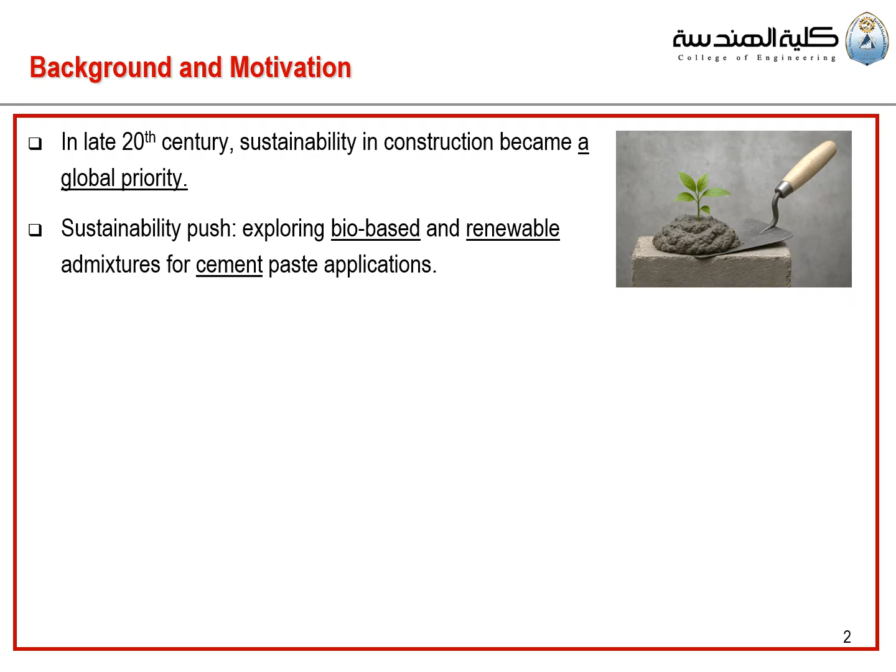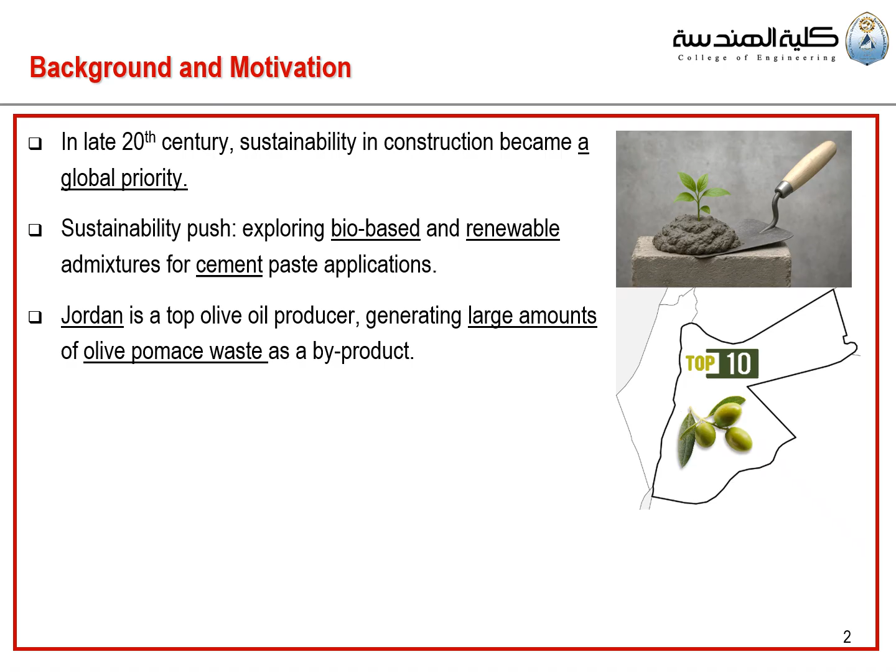Here in Jordan, we have a problem, as Jordan is considered one of the top 10 olive oil producers. We generate a large amount of agricultural waste called olive pomace waste. This olive pomace is renewable, rich in lignin, and has potential for cement modification.

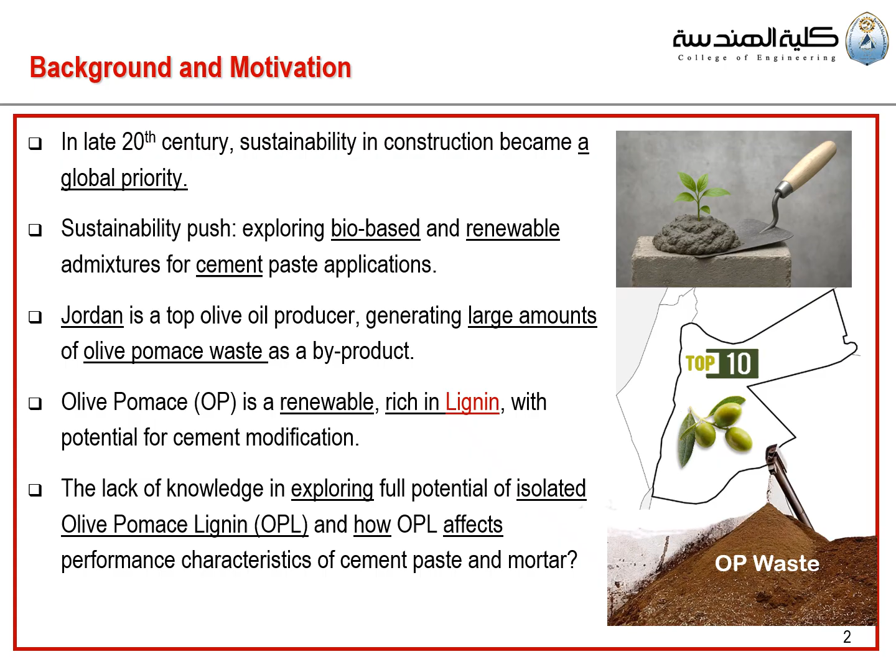Scanning the literature and state of the art, we found the potential of isolating olive pomace lignin has not been fully explored. The use of olive pomace itself in cement modification is not new, but using isolated lignin is a novel approach to test its effect on performance characteristics, especially in cement-based mortar.

This is the third study in a line of research effort. Our previous work established the successful application of OPL (olive pomace lignin) in asphalt binder modification, and we also studied its performance, economic, and environmental evaluation in asphalt concrete pavement. Both were published this year and will be on the reference list in the last slide. Feel free to access them for more details on the application of OPL.

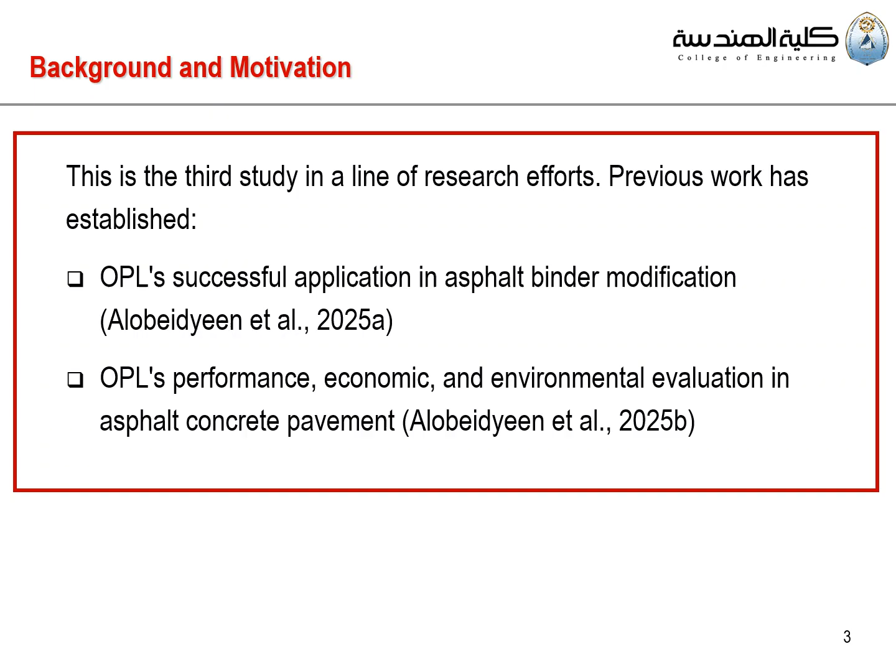The research objectives: first, we want to characterize the fundamental behavior of OPL as a cement admixture. Here, OPL is tested as a chemical binder modifier, not as a structural component. We are not interested in the effect of OPL on the original mix composition or in replacing cement or sand in mortar, because we believe lignin is an organic polymer.

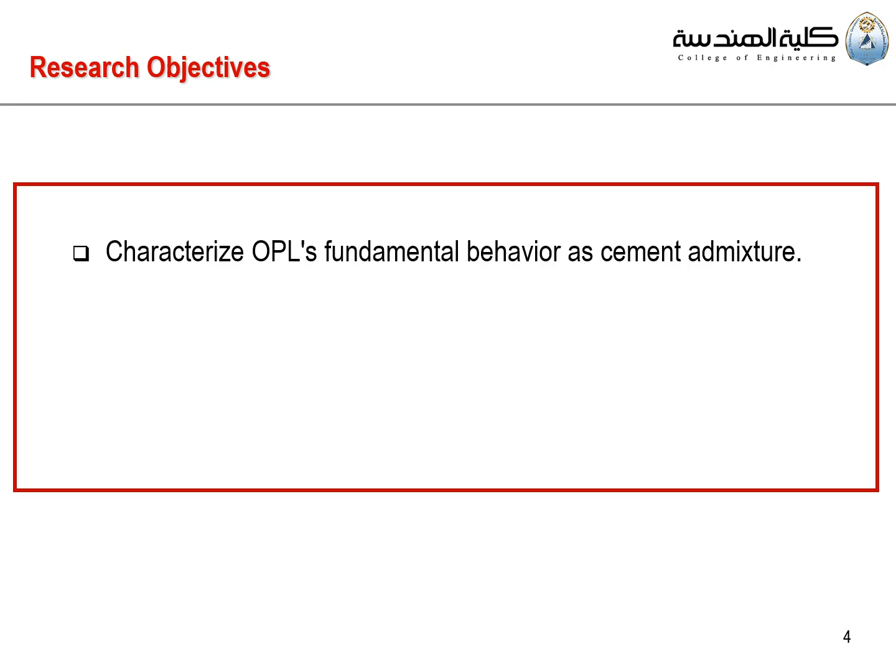It will act differently compared to olive waste byproducts like ashes, which are sometimes successfully used to replace sand because, despite being waste, ash has a mineral silica base and exhibits pozzolanic activity. Next, we want to quantify mechanical property development versus dosage, and then identify the optimal dosage for maximum performance enhancement.

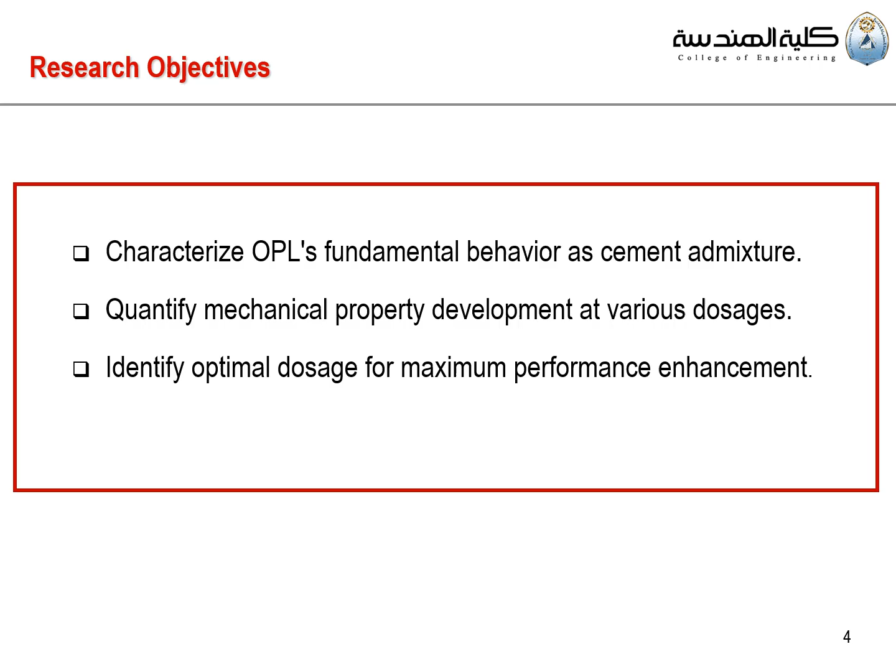Moving to the experimental methodology: the materials include olive pomace sourced from a local olive mill in Tafila, Jordan, and Portland cement, type CEM I, supplied by Lafarge Jordan, Rashadiyah Tafila. We also use sand and mixing water to develop the mortar.

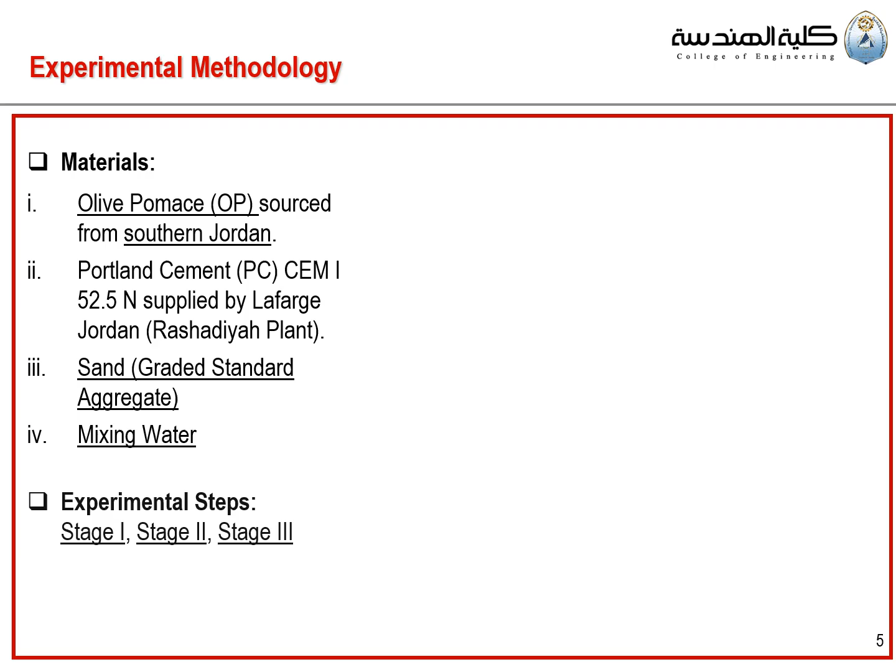We have a chemical team that worked extensively on this stage, and the final product is the extracted lignin in dry basis form. We ran many tests to characterize and validate this lignin, such as elemental analysis, FTIR spectrum, and SEM images, so we can use it later.

Stage 2 is basically what this research is about: we want to have the OPL-modified cement base. We add lignin in dry form and mix it with cement, then with water, to produce the modified cement base. The dosages used range from 0.1 to 2% by cement weight.

We then test the standard consistency and setting time, the initial and final setting time. Stage 3 focuses on strength testing.

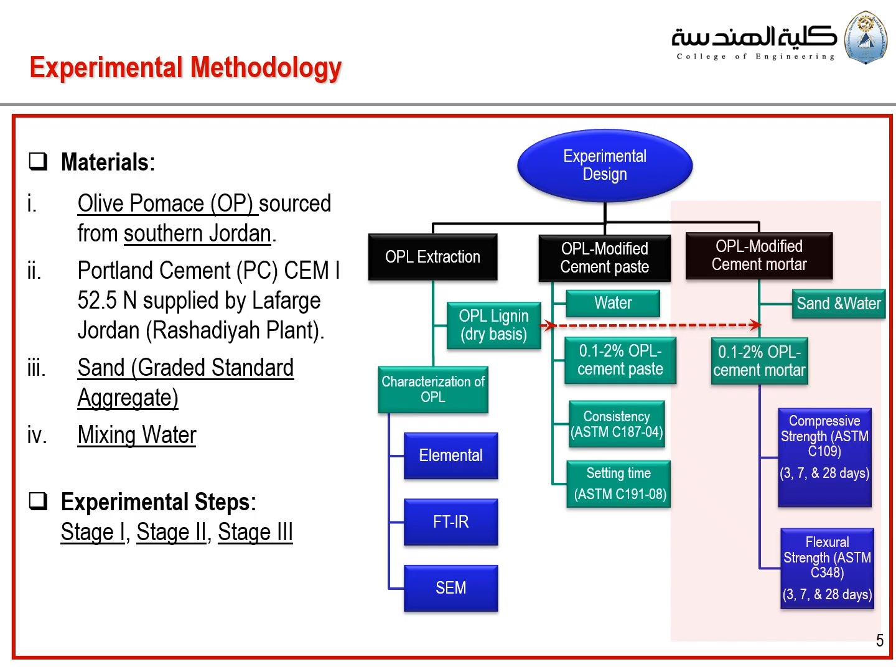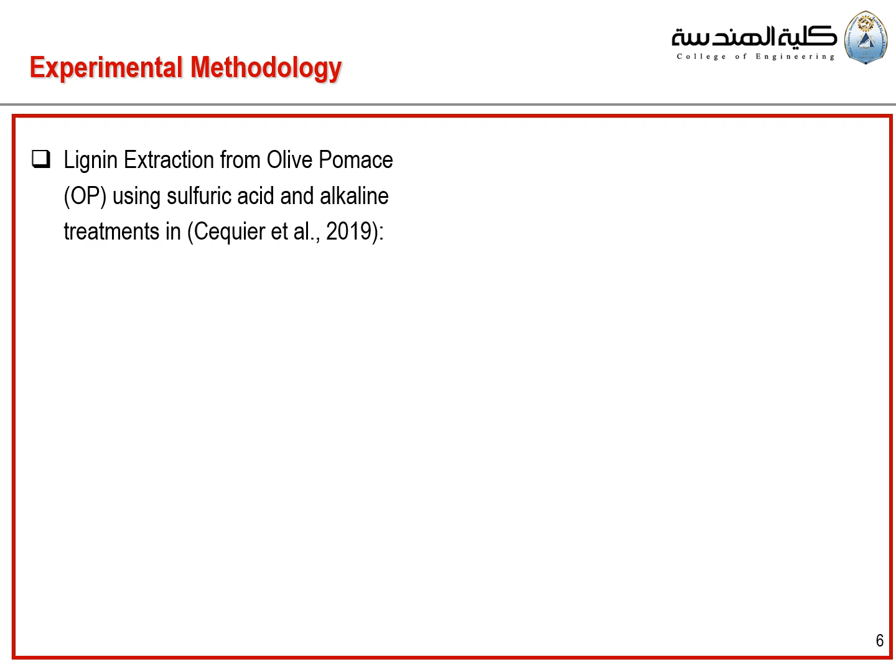For this slide, I won't spend much time, but briefly, the lignin extraction process went through sulfuric acid and alkali treatment using existing chemical research methods. We mix the olive pomace with sulfuric acid, pass it through a reactor, and perform alkali and pH adjustment using NaOH.

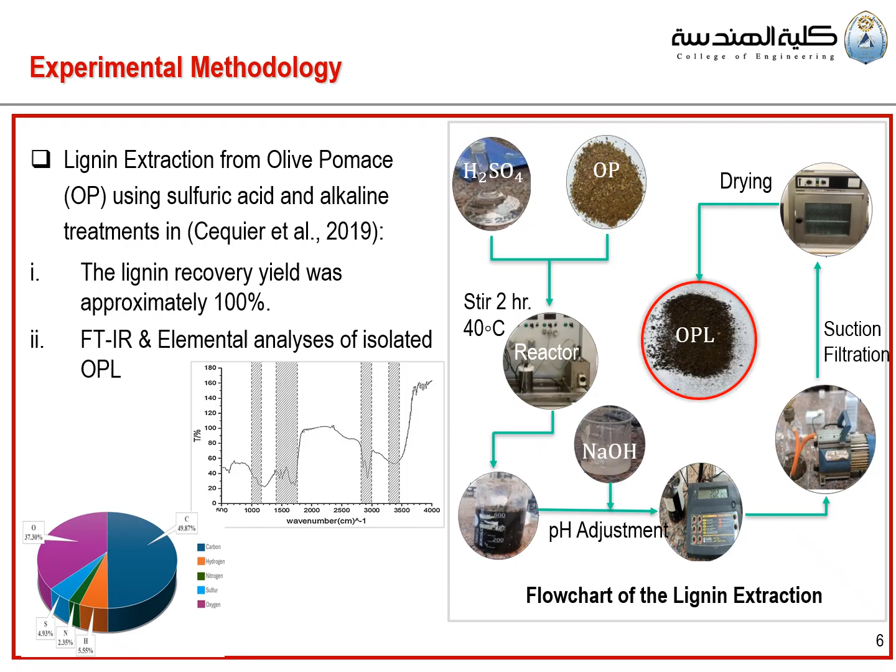Finally, we obtain the OPL. Using this specific methodology, the yield was 100% recovery of the total 35% lignin content in the olive pomace. We also performed extensive analysis to characterize and validate the OPL. If you are interested, you can refer to our previous work for more details on the lignin extraction, in the two publications mentioned earlier, both published this year.

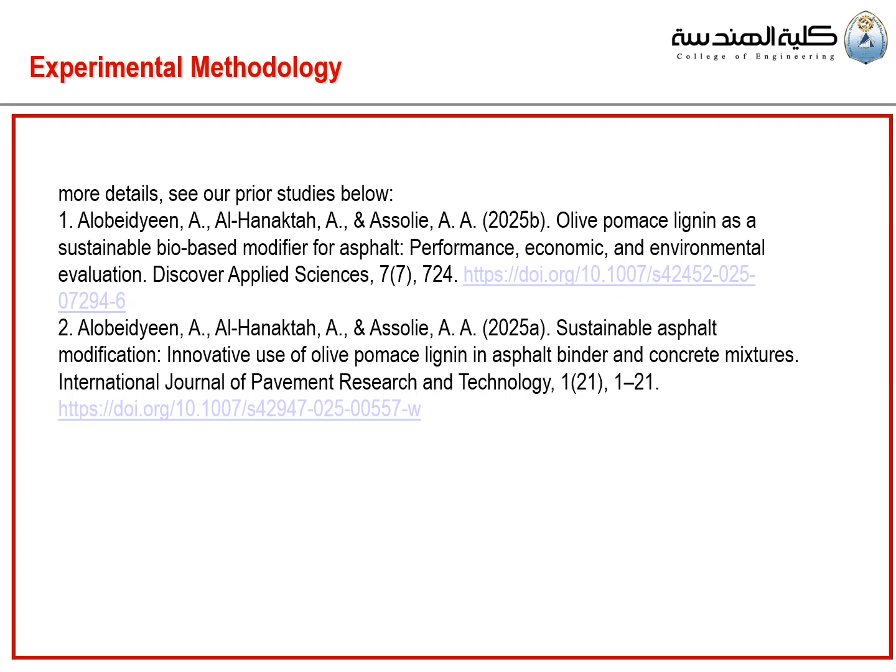Experimental results. First, we will present the cement paste performance. So here we have two tests.

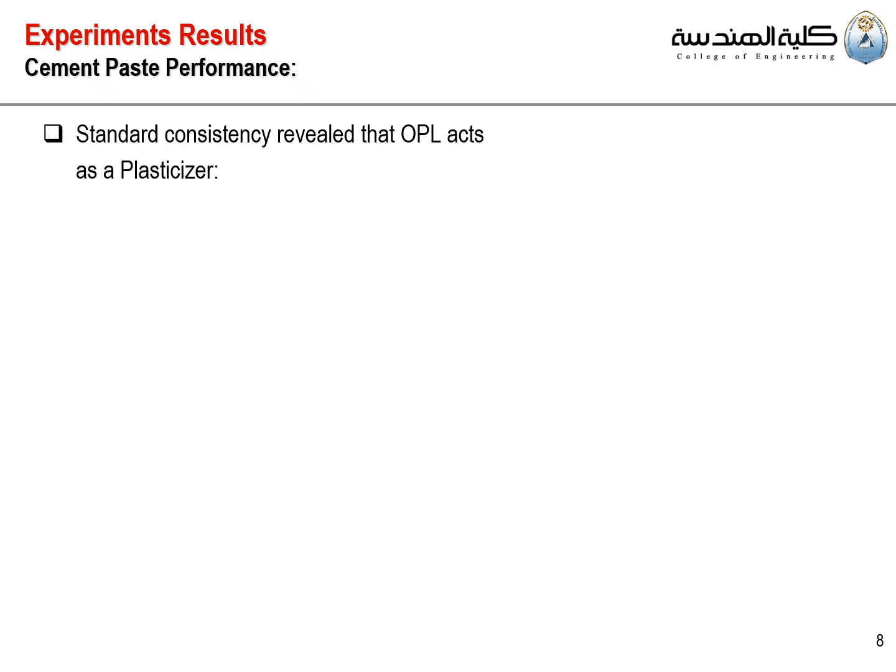This reduction can be categorized based on dosage levels. At low dosages, from 0.1 to 0.3%, we have water reduction from 2.5 up to 6.8%. This suggests that OPL is insufficient to achieve complete particle surface coverage.

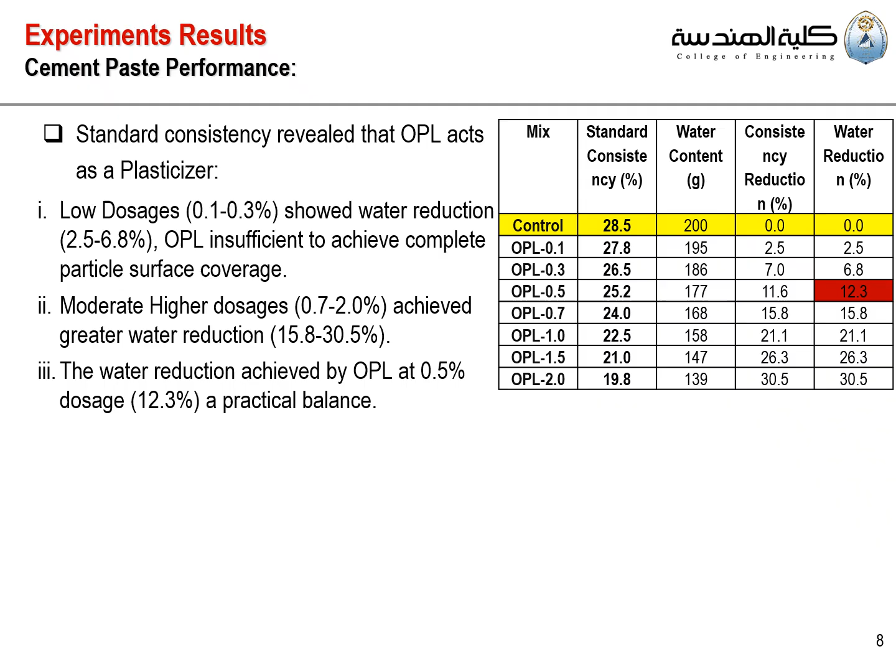On the other hand, at moderate to high dosages from 0.7 to 2%, we achieved greater water reduction, 15.8 to 30.5%. This is much higher, but the optimal dosage is OPL at 0.5%, where we have 12.3% reduction. It shows a practical balance between performance and economy.

As you can see from the figure, we have the OPL dosage percent by cement weight plotted against standard consistency and water reduction. At 0.5%, we have a 12.3% water reduction as a practical balance.

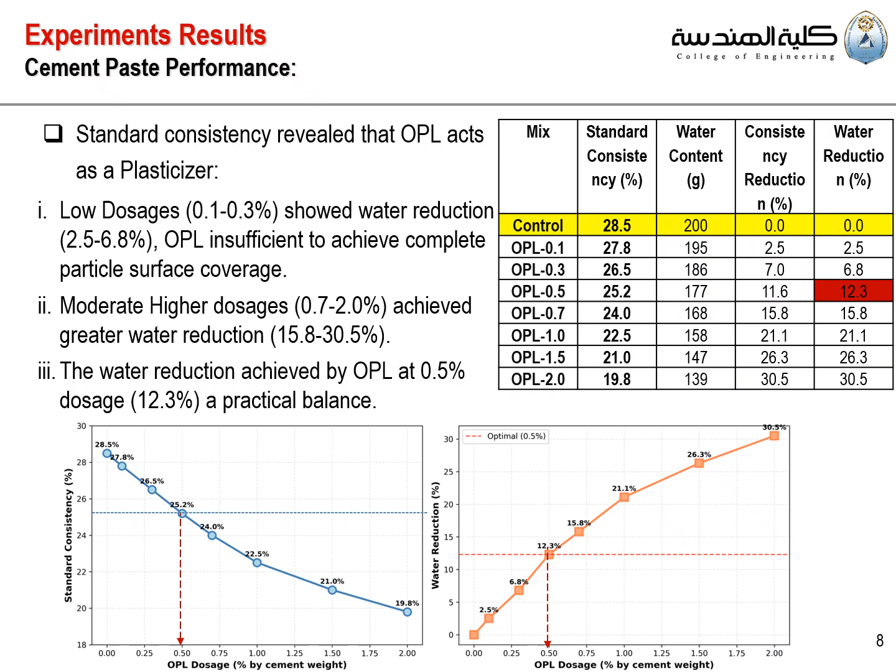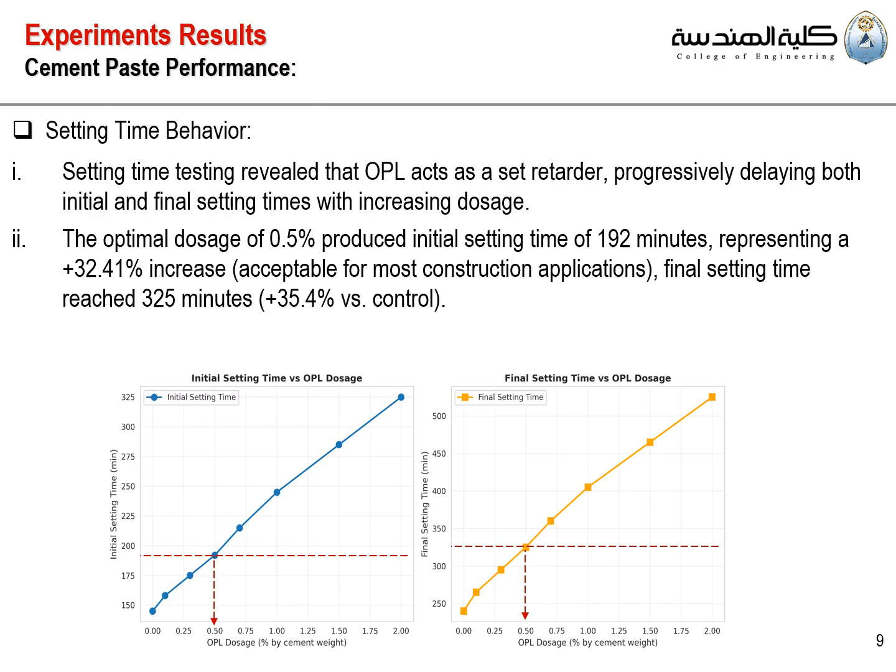We can see that the optimal dosage at 0.5% produces initial setting time of 192 minutes, representing a 32.41% increase, which is very acceptable for most construction applications. The final setting time reached 325 minutes, with an increase of 35.4% versus the control sample.

We have to point out that the final-to-initial time ratio remained relatively constant, at 1.65 to 1.69 across all mixes.

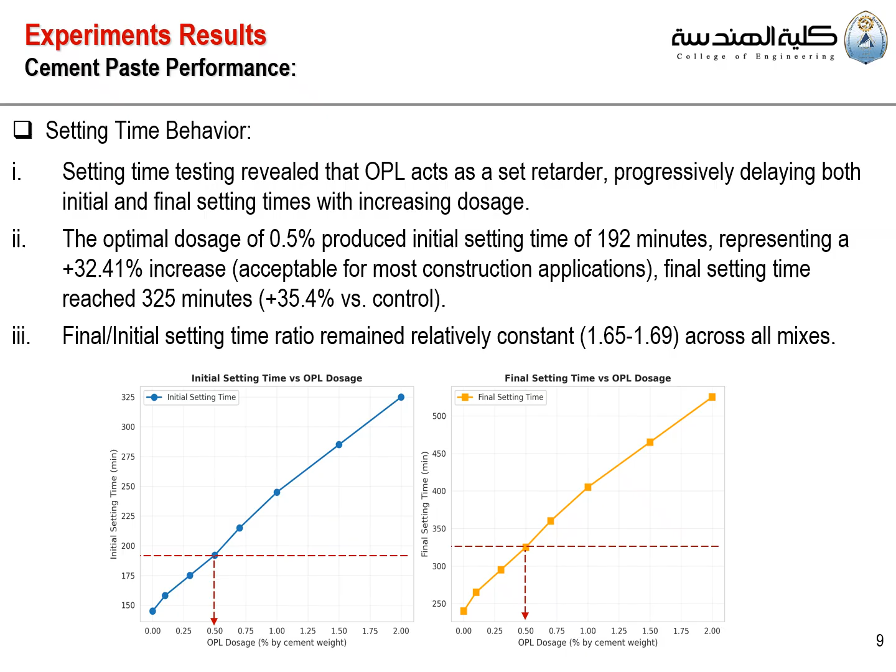For this slide and the next slide, we will present the strength testing performance for the OPL modified cement mortar. We will start with the compressive strength testing, which we performed for all mixes at all curing ages: 3, 7, and 28 days.

What compressive strength testing shows for all curing days reveals a complex and dosage-dependent effect of OPL on mechanical properties development. At low dosages from 0.1 to 0.5%, mixes show strength enhancement for all ages - 3, 7, and 28 days. The optimal is reached at OPL dosage level 0.5%.

This is basically an 18.68% increase. For the moderate dosage of 0.7%, we still see enhancement, but lesser than 18.68% - we reach plus 10.46% at the 28th day.

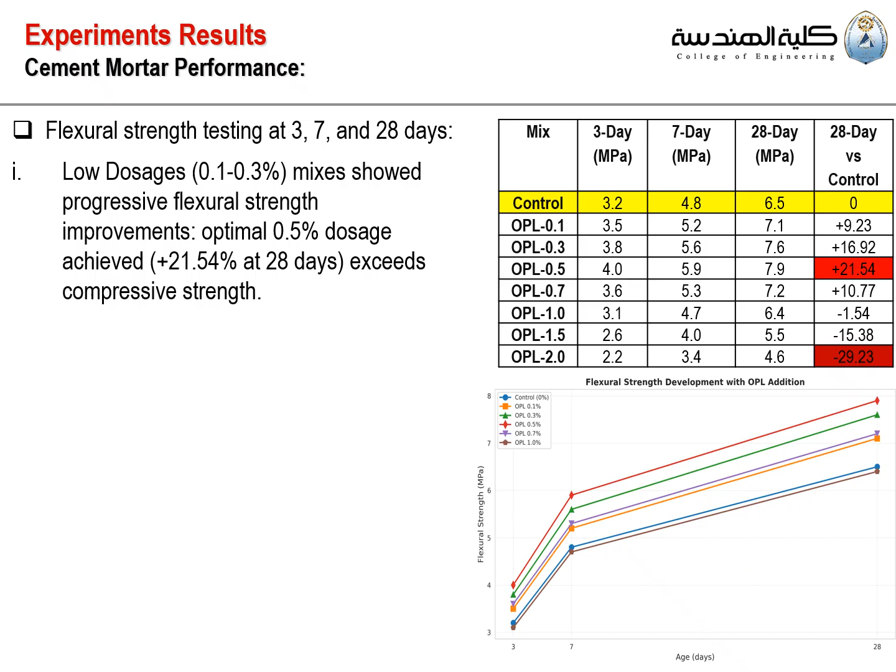The OPL addition also influences flexural strength in a dosage-dependent manner, similar to compressive strength. At low dosages, we see progressive improvement in flexural strength. The optimal is 0.5%, achieving an increase of about 21.54% at 28 days, exceeding the compressive strength improvement.

This is very important - we believe that OPL microstructure refinement particularly benefits tensile and flexural performance compared to compressive strength improvement.

At intermediate and high dosages from 0.7 to 2%, we see declining strength, with severe reduction of negative 29.23% at 28 days with the OPL 2% mix.

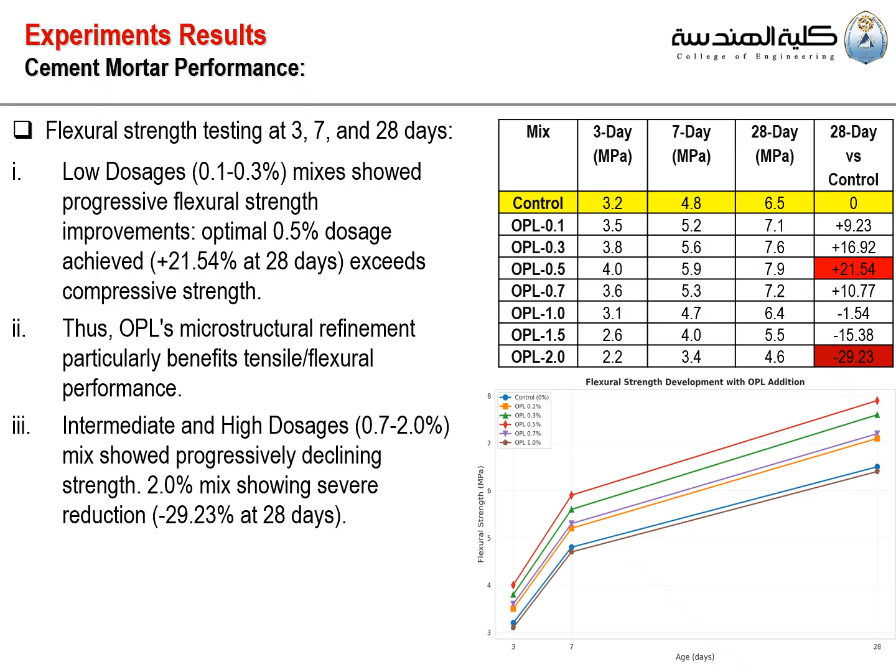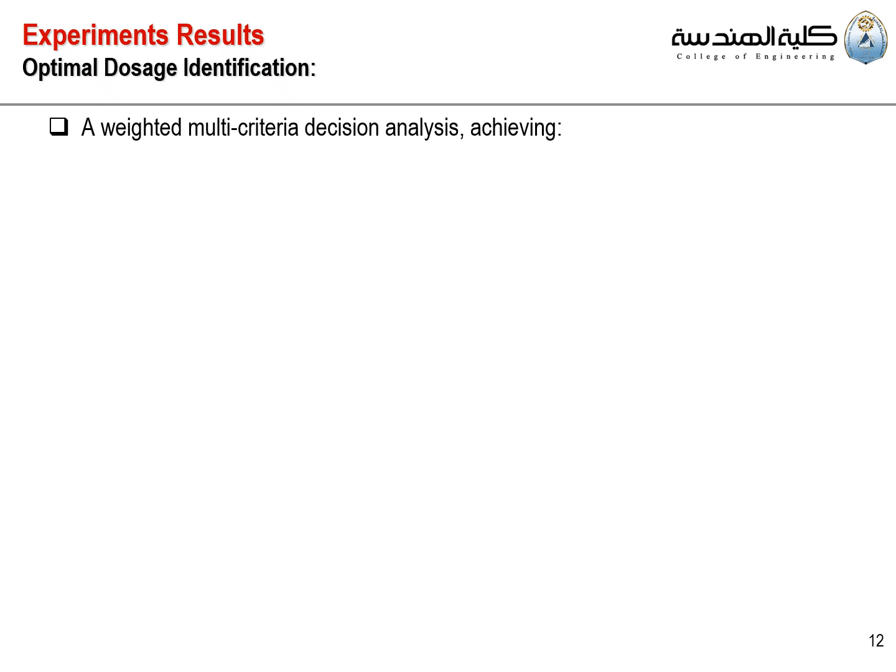For our last research objective, we want to identify the optimal dosage level for OPL to be incorporated with cement paste and cement mortar. The study uses a weighted multi-criteria decision analysis, achieving percentage increases of compressive and flexural strength, which we already presented before.

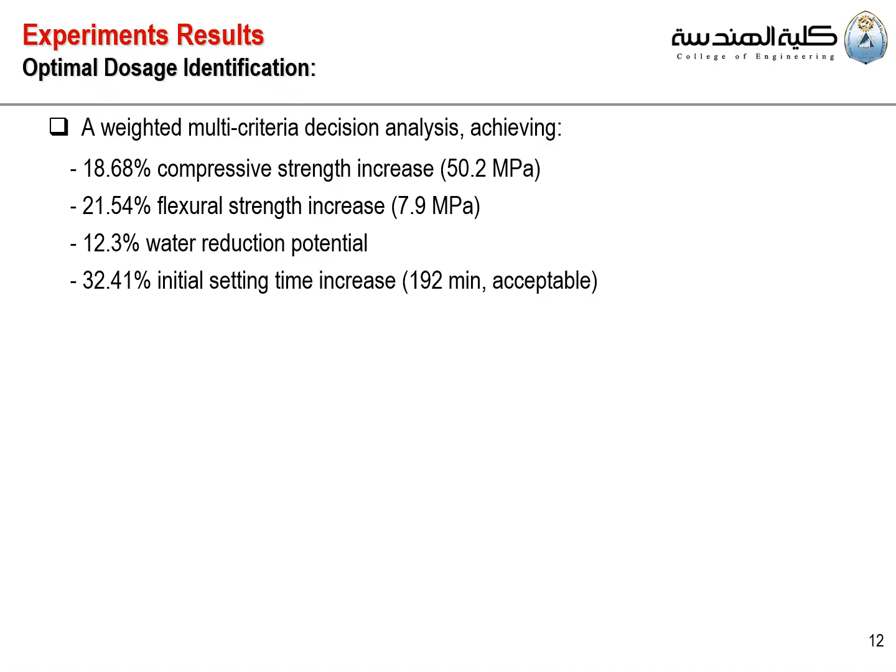We also have the 12.3% water reduction potential and 32.41% initial setting time increase, about 192 minutes, which is acceptable. The convergence of these multiple optimization criteria leads us to the 0.5% dosage, providing high confidence in this recommendation for practical application.

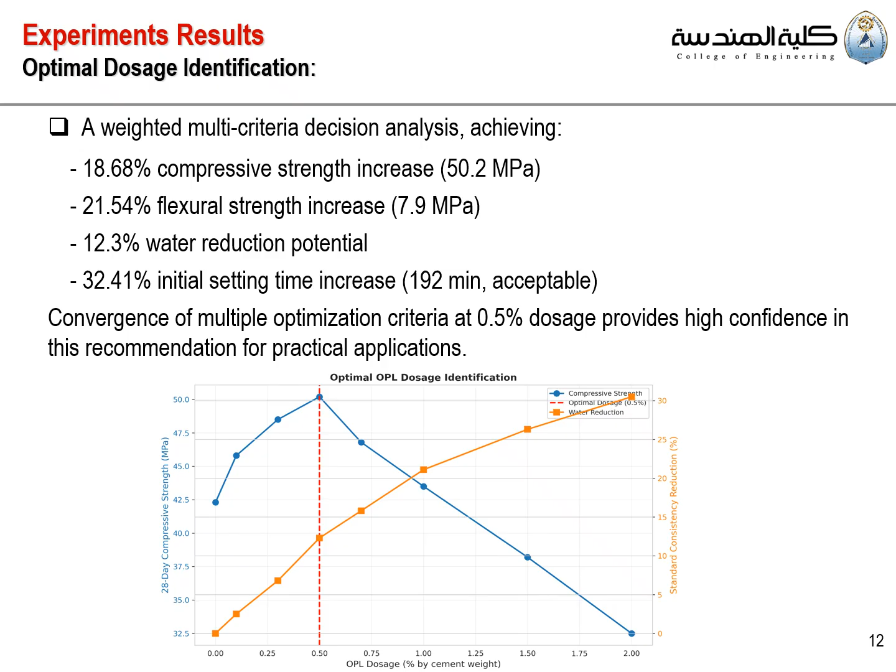To finish our presentation, here is the conclusion. First, OPL functions as a double-action admixture, acting as a plasticizer and a retarder in cement-based systems.

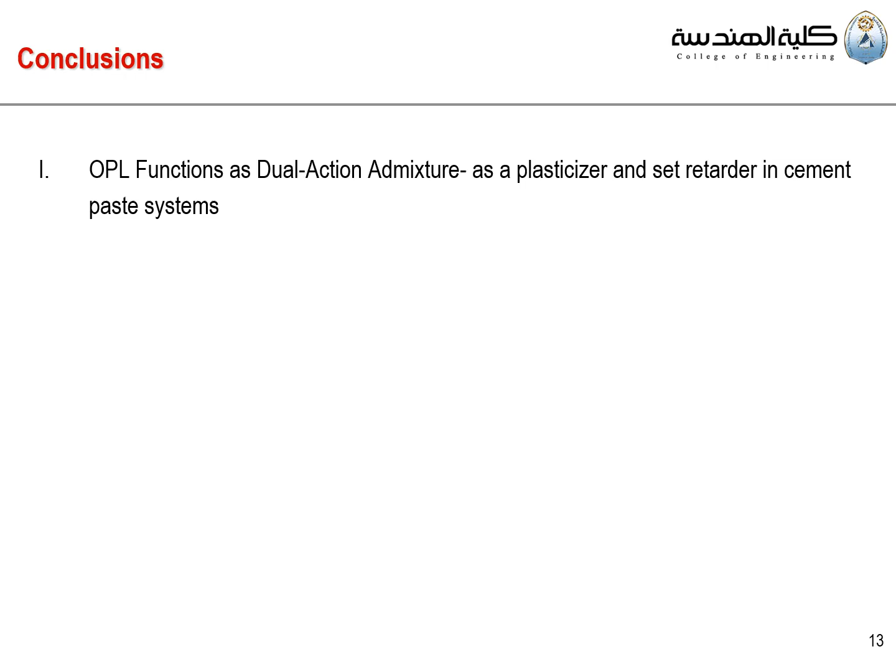The optimal dosage for OPL is identified to be 0.5% by cement weight. It increased 28-day compressive strength from 40.3 megapascal for the control sample up to 50.2 megapascal. It also increased flexural strength from 6.5 megapascal for the control mix up to 7.9 megapascal.

It also shows a 12.3% reduction in standard consistency, enabling water reduction and workability improvement, which is very good. And it shows a 32.41% increase in initial setting time, remaining within acceptable construction timelines.